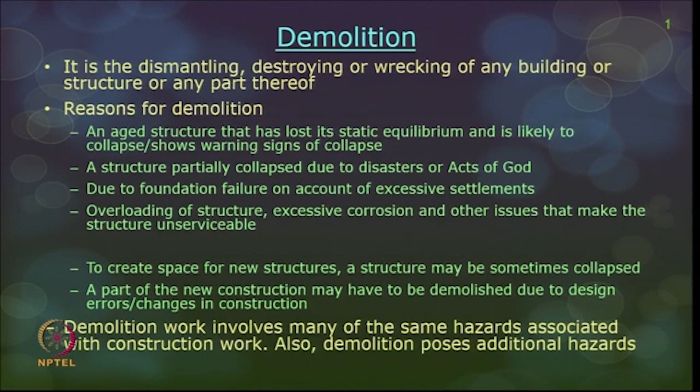Overloading of the structure, excessive corrosion, and other issues which make the structure unserviceable are all reasons a structure has to be demolished. Now, how do you start with demolition? Safe planning of the demolition work. Whenever you want to start demolition work, you do not go to the site and start collapsing the whole structure. First, the area has to be studied. The adjacent structures in and around the building to be collapsed have to be analyzed first.

Before starting the actual demolition, all the adjoining structures have to be seen, their foundations, their stability, and how far the structure to be demolished is in line with the other structures. Everything has to be analyzed, because the method of demolition should not affect the adjacent structures. Also, if there is a hospital close by, the nuisance effect of the demolition should be kept as low as possible. So the area around the structure to be demolished has to be thoroughly studied first.

Then the actual structure to be demolished also has to be thoroughly studied. Why? Because there can be hazardous substances inside the structure, or the structure can be partially collapsed. The stability of the structure and the way it is in place have to be analyzed, because the method of demolition depends on the actual structure. So a definite plan of procedure for the demolition work, depending on the manner in which the loads of the structural parts are supported, has to be studied.

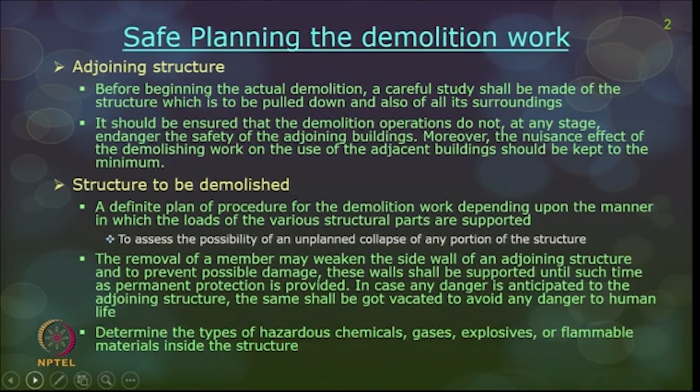The possibility of an unplanned collapse of any portion of the structure during demolition should be ascertained. Wherever there is a side wall of an adjoining structure, you should think of the way to remove the member, and permanent protection should be provided in case of an unexpected collapse. If any danger is anticipated to the adjoining structure, you have to vacate it to protect the lives of the occupants. And you have to determine the types of hazardous chemicals, gases, explosives or flammable materials inside the structure before demolition.

Safe precautions before the demolition work: danger signs should be conspicuously posted all around the structure. The area should be barricaded, with no entry of children or public, and no worker except those required for the demolition work should be allowed inside the barricaded area. Even though the area is fully barricaded, provision should be made for at least 2 independent exits for the workmen to leave in case of an emergency.

And even in the nights, there should be red lights placed on all the barricades and on the structure to know that there is a demolition which has happened. Sometimes you collapse a structure, and after some time there can be partial collapse continuing to happen. So the area has to be warned off to the public that the demolition has happened, and there can be some unexpected events which may happen.

No unauthorized person shall enter the site of demolition outside the office hours, and even authorized people are not supposed to go unnecessarily into the site. There should be watchmen posted at all exit points to prevent the entry of public and other unauthorized people.

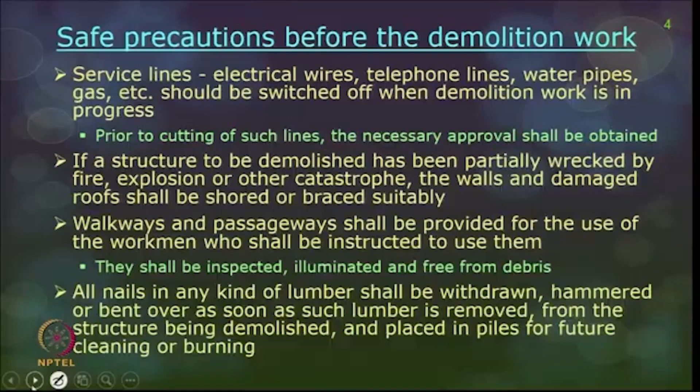Okay, again some more safety precautions. If there are glazed doors and windows or any sashes, they should be first removed, because all these fragile and loose fixtures may be a very great hazard, especially when you are doing the demolition. There can be a great hazard even to the public.

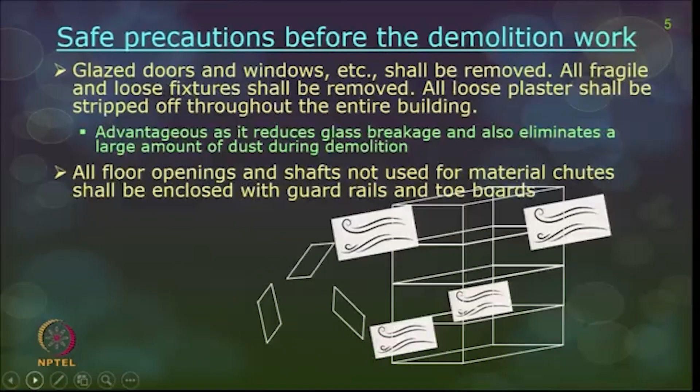And loose plasters also should be stripped off throughout the entire building, so that you can reduce the quantity of dust which comes out as a result of demolition. So, the advantage of removing the glass and plastering is to avoid glass breakage and other safety hazards, and also to eliminate a lot of dust which comes as a result of demolition.

All floor openings and shafts which are not used for material chutes should be enclosed with guardrails and toe boards, as mentioned in the earlier class on guardrails. Public and worker protection: wherever possible, the public should be kept out of the site, and workers should have a proper way of entry into the structure and exit.

So, accordingly there should be a sidewalk shed constructed. If the structure to be demolished is more than 2 stories or 7.5 meters high, then the adjacent road should be closed and the sidewalk shed should be constructed. There are clear dimensions given on how the sidewalk sheds should be, as given in OSHA and IS codes.

The sidewalk shed should have a minimum clearance of 2.4 meters for its height, and the toe board should be at least 1 meter high above the roof of the shed as shown here, and the toe board should be facing outward or it can be vertical, and when it is facing outward it should not be more than 45 degrees, in order to catch the debris which falls onto the sidewalk shed.

The roof of the sidewalk shed should be very strong and capable of sustaining a load of at least 73 Newton per mm square, and the roof should be designed taking into account the impact of falling debris; that also should be taken care of.

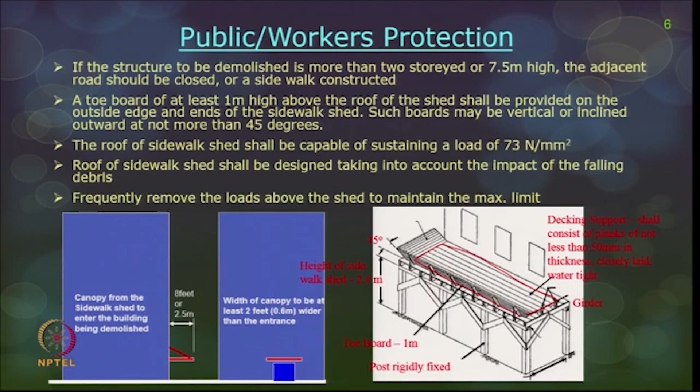So, actual demolition operations. As I said, more precautions should be taken in terms of safety for demolition work as against regular construction, because a demolition operation has the same hazards as normal construction work. The only difference is that demolition generally happens in the reverse order of construction. In construction you go from foundation, then walls, columns, floors and so on, but in demolition you go from the top floor down, floor by floor, then to the ground floor and then the basement.

So, demolition shall always proceed systematically, storey by storey, from the top floor to the bottom floor and basement, and it should proceed in such a way that it causes the least damage and nuisance to adjoining buildings and members of the public, and it should satisfy all safety requirements to avoid accidents. Now, there are 3 types of demolition you should know: number 1 is manual means, then mechanical demolition, and the third one is induced collapse. All 3 have extremely different characteristics.

For example, manual means is very slow in bringing down a building, because you use a concrete breaker or a pneumatic breaker driller for drilling and breaking the whole structure. It is a very slow process, but in terms of hazard levels it is not too hazardous in terms of dust, pollution and so on. So, in that way manual means is a good way of demolition. It is still applicable for smaller projects. Pneumatic drillers and concrete breakers are generally used for breaking down a structure.

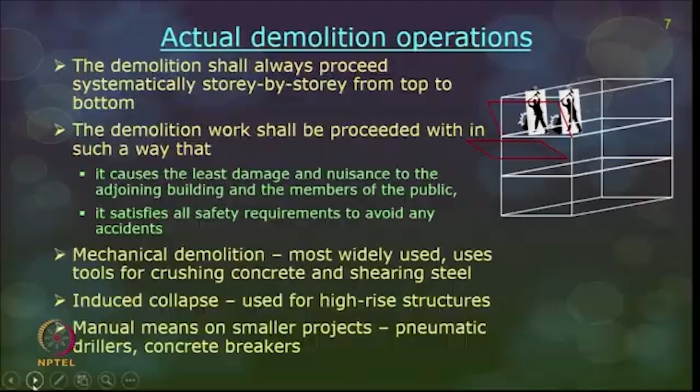The feasible option between these 2 extreme cases is mechanical demolition. As the name implies, there is a crane with a steel ball, which starts moving and striking the wall and the building, and as a result the building starts collapsing. So, this is not as slow as manual means, nor as quick as induced collapse; it takes moderate time. It is most widely used, and it uses tools for crushing concrete and also for shearing steel if you have an RCC structure. So, mechanical demolition is the most commonly used, and we will discuss safety precautions in mechanical demolition.

So, no worker is allowed to enter that premises, and only workers necessary to perform work will be permitted to work in that particular area, and the area is supposed to be completely barricaded to a minimum distance of 1.5 times the height of the wall. Accordingly, the area has to be barricaded because this may have falling debris on quite a wide area.

Mechanical devices should be so located that the falling debris is not falling onto the equipment and causing a failure. The equipment shall also not cause any damage to power lines, overhead lines or any lines which are above, and also to the adjacent structures which are close by.

And the workers engaged in the demolition job should always stand on a firm base, and the free ends of cut members can also be used as a work platform, but they must be properly shored and fastened when the workers are using it as a base to stand.

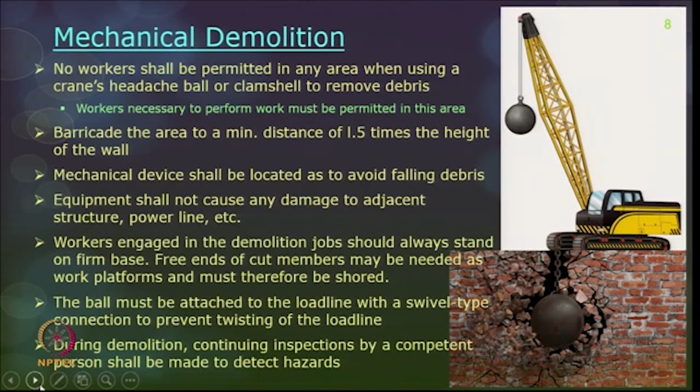The ball must be attached to the load line with a swivel type connection only, so that it is not twisted when in action. Okay, the ball should go very freely onto the wall, come back and onto the wall. So, it should be a swivel type connection so that it is not twisting and turning.

During demolition, continuous inspections by a competent person should be made on the structure, whether the weakened portions are still stable or not, and what about the collapse of the whole structure. So, that should be ensured, and so on.

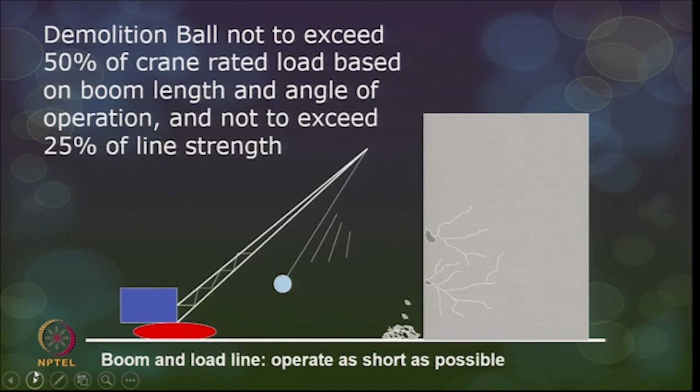Now, the demolition ball should not exceed 50% of the crane's rated load, and it is also based on the boom length and the angle of operation. Okay, they should not exceed 25% of the line strength, and this boom and load line should be operating as short as possible, and also you should keep in mind that the falling debris is not affecting the crane and the equipment.

Now, removal of materials or chutes. There are so many ways to remove the debris. Okay, that is the term we generally use for the broken pieces of a structure. This debris can be removed from the structure through two means. The two common means are, one is chute and the other one is your floor or roof openings. Okay, chutes, if provided, have to be at an angle of not more than 45 degrees.

This is a building. Okay, this is the load from where you are actually going to put it, and this is your floor opening. Okay, so this angle is what I am talking about. Okay, this is a place for collecting all your debris. Okay, so if a chute is having more than 45 degrees, what happens is the slope is very steep.

Okay, and as such it should be closed on the upper side also, on all four sides preferably. In this case it is a vertical chute. Okay, that is why it is fully closed, and the area is also put with a debris net, so that there is no fall hazard outside the particular area. It is barricaded completely.

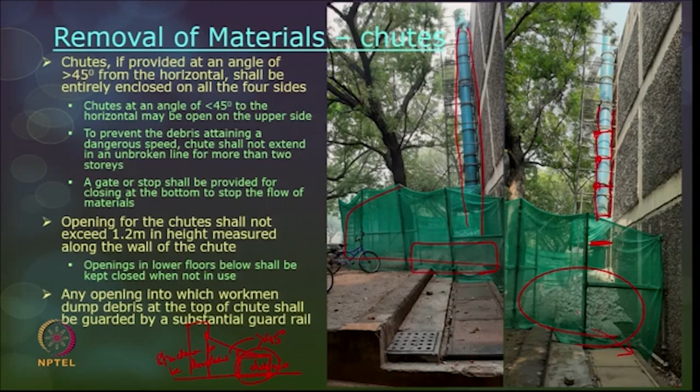Opening for the chutes shall not exceed 1.2 meters in height. For example, this is the level at which the chute is there and this is the floor level. So this height should not be more than 1.2 meters, along the wall of the chute, and the openings in the lower floors below should be kept closed when not in use. This is not a regular demolition work, so it is open, but generally it is closed when it is not in use and every time it has to be dumped.

An opening into which the workmen dump the debris, which is this opening. So this is primarily a parapet opening. So this opening should have a proper guardrail so that the workmen are not having a fall hazard. Whenever this particular opening is open and debris are coming in, all other openings should be accordingly closed on the levels below.

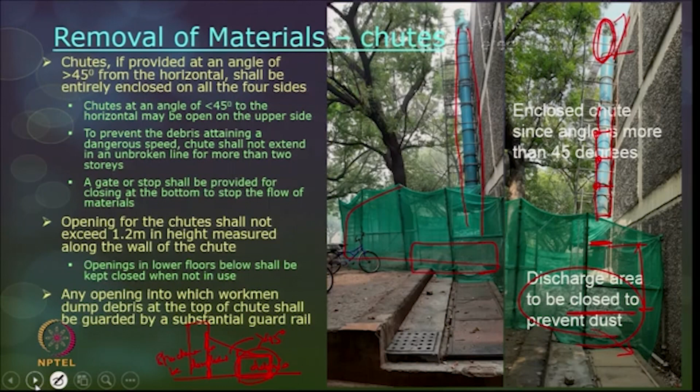Then removal of materials through floor opening. As I said, most often the demolition material is generally collected into the building only. They are not collected and stored outside of the building. So there can be floor openings into which the material can be dumped onto the lower floor by throwing it into the lower floor. But there are some safety precautions for throwing the material into the floor openings and collecting it onto the ground floor.

The total area of the hole cut, sometimes it can be a natural cut, sometimes it can be cut specifically for throwing in and collecting all the debris. So this area, whatever is cut for throwing in the material, should not be more than 25% of the complete floor area. That should be the number one safety precaution, because the slab will lose its strength and may start failing. So all the floors below should be accordingly cut when you are trying to throw in the material through floor or roof openings.

It should be ensured the storage floor is adequately strong. So this is the storage floor; it should be strong enough to withstand the falling material, because it comes with a very great impact load onto the floor. The openings in all the floors below, so this is the floor from where you are throwing the debris, all the floors below should also be properly barricaded.

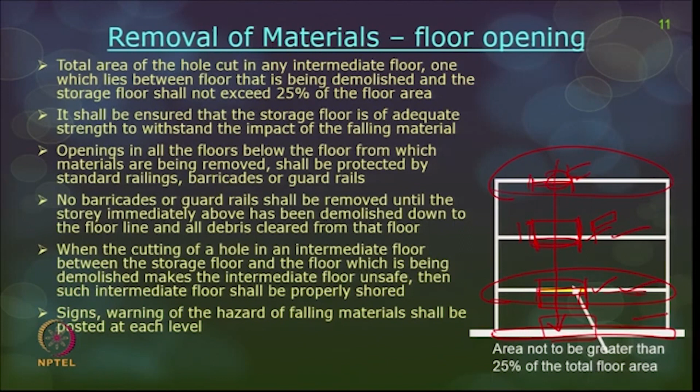When you are cutting a floor, primarily to create an opening for throwing in the debris, and if the planks are not sufficiently strong to support, then bracing and shoring has to be done to make the floor strong enough for the cut portion. Signs or warnings of the falling hazards should be posted at all levels. Every level should have a sign of falling debris.

Demolition of walls. Again, there are a lot of safety precautions given for each component of the structure to be demolished, but walls are very critical, so we will discuss walls. Walls are not allowed to fall as a single mass. If you see here, the workers are trying to push the wall at a very great speed and make it fall as a single mass. Much of the load on the structure is carried by the walls, and if the walls collapse, the structure may collapse and workers may face a fall hazard, so the walls should be removed only part by part.

So, staging should be provided for the men to work on. If the walls are very thin and dangerous to work by standing over them, then there should be another staging, and the workers can stand over there and start removing the walls. The temporary structure should also be used to support your centering or shuttering, and there should be adequate precautions for maintaining the structure and clearing of your walls.

No section of a wall whose height is more than 15 times the thickness shall be permitted to stand without lateral bracing. You have to safeguard the other sides of the wall and then only start demolishing a wall. As seen in this picture, when the workers are trying to collapse a portion of this particular wall, the wall starts automatically to collapse. Accordingly, lateral bracing has to be there: if the wall height is more than 15 times the thickness of the wall, it should not be allowed to stand

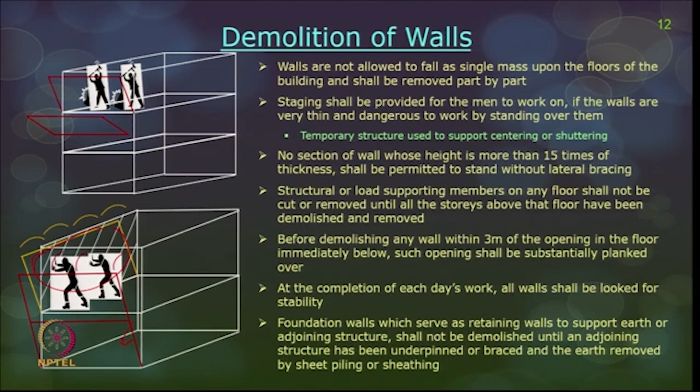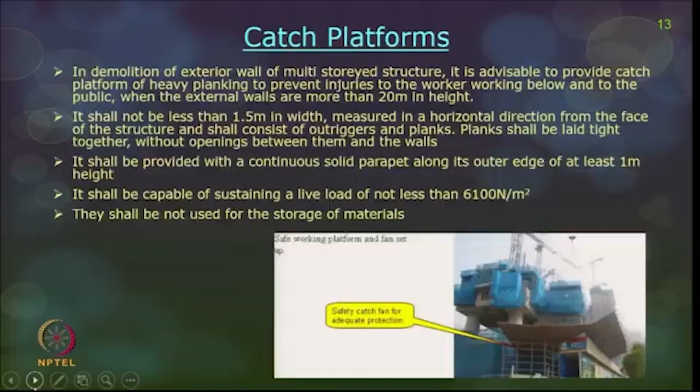and taken off. Catch platforms. Sometimes there are a lot of catch platforms, especially when you are doing a multi-storied building, and these catch platforms are outside the structure in order to collect all your debris. So, in demolition of exterior walls, especially in multi-storied structures, it is advisable to provide small catch platforms of heavy planking to prevent injuries to the workers working below and to the public when the external walls are more than

20 meters in height. These catch platforms shall not be less than 1.5 meters in width, measured in a horizontal direction from the face of the structure, and shall consist of outriggers and planks, and the planks shall be laid tight together without any openings between them and also between the walls, so that loose pieces do not fall off to the ground level. So, it should be able to catch all the debris.

The catch platforms shall be provided with a continuous solid parapet along the outer edge at least 1 meter in height, so that even the bigger debris is collected inside the catch platform and not falling off. So, 1 meter height is just like a guardrail protection. It shall be capable of sustaining a live load of not less than 6100 Newton per square meter, and they shall not be used for the storage of material.

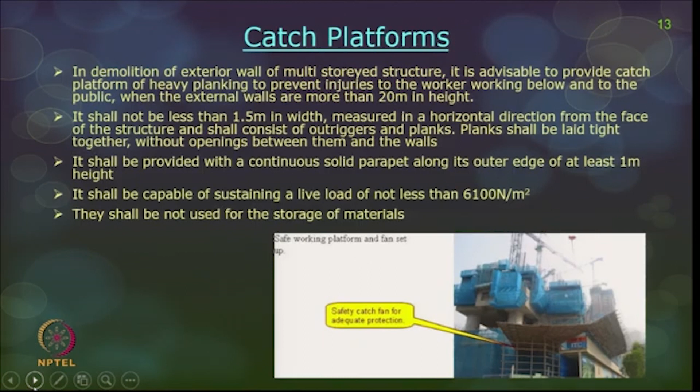So, as and when the catch platform has reached sufficient load, it should be cleared and reused. After the debris is there, it should be transferred through the chutes, and the catch platform is again ready for collecting all your debris.

Removal of debris and Malba. There are two terms which come together. Debris is the serviceable component, and Malba is a component which has to be trashed or thrown away. So, as the demolition work goes on, and after it is complete, the released parts are generally classified into two categories. One is the serviceable part, and the other is the unserviceable portion.

The unserviceable portion is generally also stored and stocked at suitable time intervals for clearing and disposal. In any case, the height of the Malba heap shall be limited in order to avoid toppling over or falling on to people who are passing by and so on.

And the Malba should be stored in the demolition site only and should be removed to a location as requested by the local civil authority, and depending on the space available in the site, it has to be stored and stacked. The materials which are likely to cause dust or any undue environmental pollution should be removed from the site very quickly, and till then they should be covered.

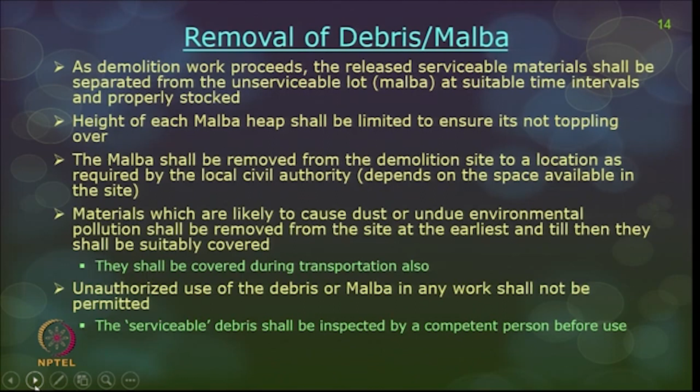So, during transportation also these dangerous substances or Malba should be again closed and covered. Unauthorized use of debris or Malba in any work shall not be permitted, and even the serviceable debris which is used for recycling should be inspected by a competent person before it is taken for use.

Now, how do we classify the debris? Generally, after the debris are taken off, there are so many types of debris which come in, which include primarily earth, plaster, mortar waste, bricks, blocks, concrete, glass, steel, wood or wallpaper, tiles, slates, stones, pipes of different sizes and varieties, sanitary ware and so on. Like this, you get so many varieties of debris, and some may be partially damaged, some may be fully damaged also.

The salvageable materials which can be of some economic value are all removed first, which can be reused. Generally, these salvageable materials are removed even before the demolition takes place. Sometimes in induced collapse, when the structure has to be brought down in no time, then after the induced collapse the serviceable or usable materials are first relooked at, and then they are removed from the debris first. Then the remaining debris are accordingly classified into dangerous, hard debris and soft debris.

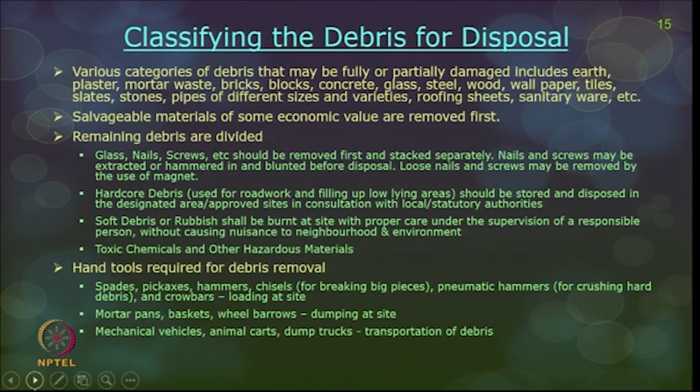Throwing of debris from a certain height is generally avoided. From a safety point of view, carrying debris on the head using a mortar pan or anything else through stairs should be avoided as far as possible, because it can cause environmental pollution or it can fall and cause a slip or trip hazard. The area where debris is likely to fall should be barricaded, and warning boards and danger signs displayed until the area is completely cleaned. If fine particles exist and you suspect any dust nuisance, water can be sprinkled so that it is not creating a nuisance or dust pollution.

If possible, the debris shall be filled in used gunny bags for bringing down from the floors above, and can be stacked in one particular area on the site. The glass and steel shall be dumped or buried separately to prevent injuries to workers, and the debris should be removed as soon as possible to the dumping ground, and according to the classification should be moved to the dumping area as already planned by the site engineers.

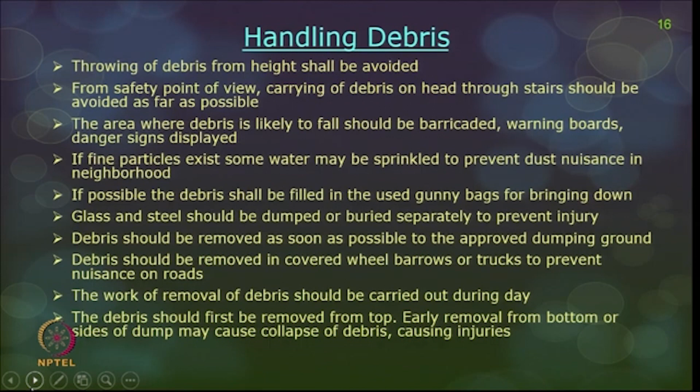The debris as far as possible should be removed in covered wheelbarrows or trucks to prevent nuisance on the roads and also to prevent environment pollution. The work of removal of debris should be carried out only during the day; unless it is an emergency, it can be carried out in the night, and all other extra precautions have to be taken when the debris is handled at night. The debris should first be removed from the top, because otherwise it can collapse, causing injuries.

General safety precautions: no demolition work should be carried out in the night unless it is an emergency. No demolition work should be carried out when there is heavy rain, thunderstorms and so on. A warning device shall be installed in the area to be demolished to warn the workers in case of any danger. Goggles, preferably with celluloid lenses, should be worn by the workers during demolition, because there can be falling or flying debris, small pieces, dirt, dust, etc., which can be blown by the wind and cause injuries to the eyes.

In the same way, it is desirable to wear rubber or leather gloves, so that when demolishing RCC work or removing steel work, your hands are safe and not likely to get injured. Screens should be placed where necessary to prevent flying or falling pieces from injuring fellow workmen. Water may be used to reduce dust while tearing down plaster from the brickwork. If this is not practically possible, the workers are advised to wear proper face masks and respiratory masks. No unnecessary work shall go on below the floor when demolition is in progress above that floor.

Fall protection for the workers should be maintained to prevent falling from the structure. First aid equipment should be kept available at the demolition site as per the BOCW Act, which you have seen earlier. Appropriate portable first aid appliances and fire appliances should also be available in case any fire breaks out. All emergency exits should be properly marked, and workers should know how to evacuate in case of an emergency.

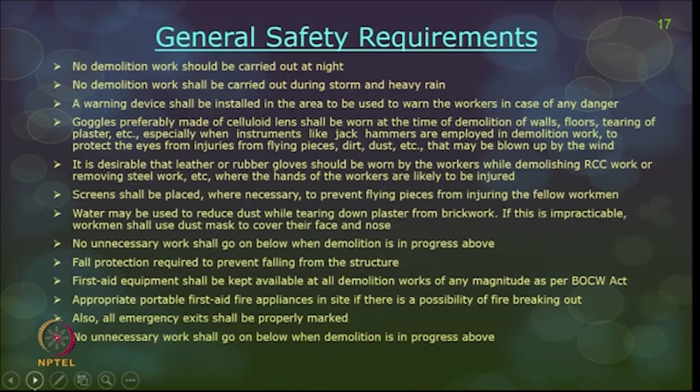Preparedness for demolition, again a recap. Methods to be used to bring the structure down have to be thoroughly studied, based on the structure to be demolished and the adjacent structures. Equipment necessary to do the job has to be thoroughly planned. Manpower requirements: always try to do the demolition work with minimal skilled laborers. Then a safety report, fire prevention and evacuation plan have to be there. Emergency first aid and security services have to be there. Assessment of health hazards in terms of toxic chemicals, or, for a concrete structure, the dust from breaking cement, has to be thoroughly analyzed. PPE has to be recommended and the mandatory PPE worn, and training has to be given to the workers in order to do the demolition.

The engineering survey report should cover the building characteristics, the level of damage to the building, the strength of the retained building, hazardous substances present inside the building, and, when demolition happens, protection of adjacent structures, including whether underpinning has to be done on the remaining structures. Even the choice of equipment used for demolition is based on the location and type of your adjacent structures.

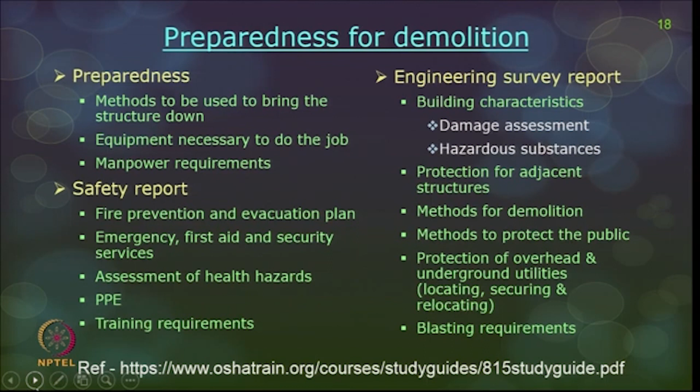Methods for demolition, methods to protect the public, protection of overhead and underground utilities, for example electric lines, water, gas, etc., all have to be taken care of, whether it is locating, securing or relocating the utilities, in your engineering survey analysis. If you want to use blasting for collapsing a structure, then all blasting requirements have to follow the IS code and OSHA requirements.

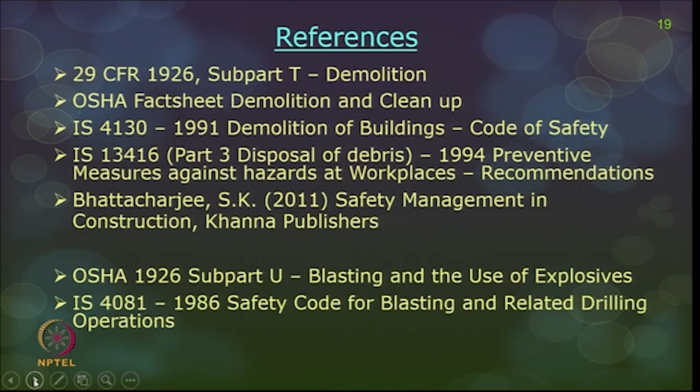So, this complete lecture was taken from these references: OSHA Subpart T on demolition, IS 4130 on demolition of buildings code of safety, IS 13416 on disposal of debris, primarily Part 3, and also a few books. For blasting, there are two codes: OSHA Subpart U on blasting and use of explosives, and IS 4081, the safety code for blasting and related drilling operations. If you want to use blasting as a method for induced collapse, you can go through these additional references.